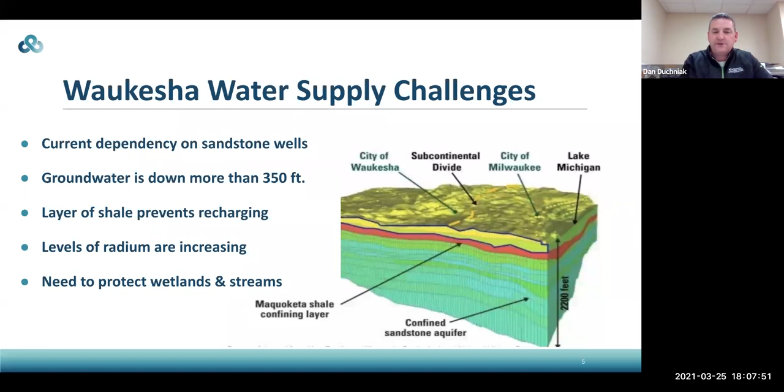So we went through a study. We looked over 20 years. We did a bunch of research and analysis, looked at more than 14 alternatives, studied 6 of them in depth, created an environmental impact statement with the help of the Department of Natural Resources, and came to the conclusion that Lake Michigan was the only reasonable water supply for the residents of the city of Waukesha.

It is not only the only reasonable, but it is sustainable for the long term because we're able to get into that recycle and reuse mode where we're able to pull water from the lake, utilize it in the city of Waukesha, treat it to a very high level, and then return it through the Root River to Lake Michigan, having that water be sustainable for the long term.

It is protective of the environment. We don't have a significant amount of impact to wetlands, rivers, and streams. And in fact, the Root River, the DNR has been looking for ways to get additional flow within the Root River for a number of years, since back in the 60s, where there was actually a plan to build a lake along Oakwood Road, pump water from Lake Michigan into the lake, and then return the water through the Root River.

So there's been a number of challenges with the Root River, and this is a way for us to gain additional flow during those low flow periods. And it is also the best solution for the ratepayers of the city of Waukesha.

So there was a number of phases that we went through. The first was working with the DNR to get approval for the Great Lakes alternative. As I said, we studied 6 alternatives in depth, and we created an environmental impact statement. That process took us over 5 years. A number of additional technical memoranda were created as part of that, and ultimately led the DNR to the conclusion that the only reasonable water supply for us was the Great Lakes alternative.

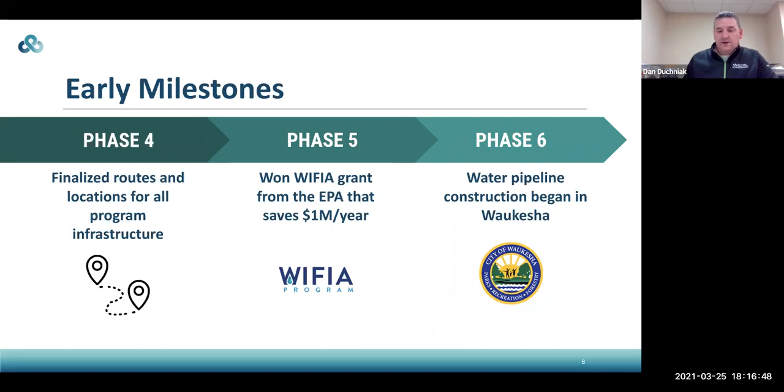That brings us to the next phase of the presentation, the route and communications. I'm going to turn it over to Katie Richardson, the program manager. She'll be taking us through this. Thank you, Dan. As Dan mentioned, I'm going to go through a little bit of the route at a high level and some of the different ways we'll be communicating with residents and others throughout the course of the program, and how you can reach out to us for more information.

So the return flow route starts in the city of Waukesha, goes from the clean water plant there through the city of New Berlin, Muskego, and then makes its way into the city of Franklin along Ryan Road, and then down south on 60th Street to the corner of Oakwood and 60th.

At the Oakwood site, there is a reaeration structure in a small building, about the size of a 2-story house, that will be operating very quietly. That's where we'll be adding oxygen back into the water before discharging it to the Root River. There's also some underground piping on that site. The Waukesha Water Utility owns about 75 acres in that area; there will be some homes across the street, but none right adjacent to it. It will be maintained to look much like it does now, except for this new additional building.

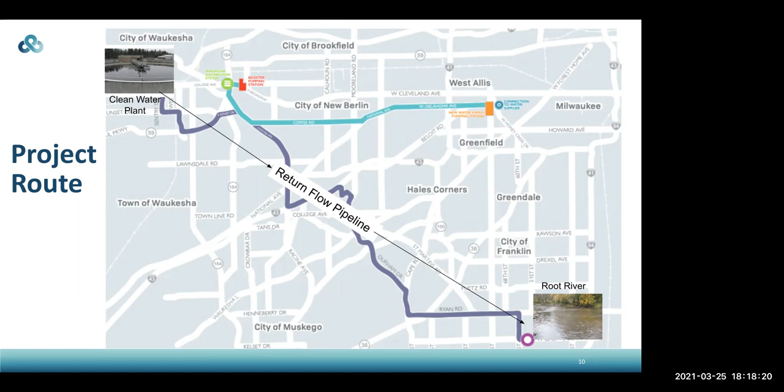The return flow pipeline might be a question that you may have. Why do we need to return this water? As Dan mentioned, as part of our approval with the Compact Council, we are required to take the same volume of water that is used in the city of Waukesha and return it back to the Lake Michigan watershed.

So there's a number of positive reasons to do this. One is that it will make sure there's a net zero impact on lake levels in the Lake Michigan watershed. It also increases the base flow of the Root River in low flow times, which is beneficial for the habitat and fisheries along the Root River east of the outfall site. At low flow scenarios, there's going to be an additional 6 inches of depth, beneficial for fish that need to spawn and come back into the river, giving them more water to work their way upstream.

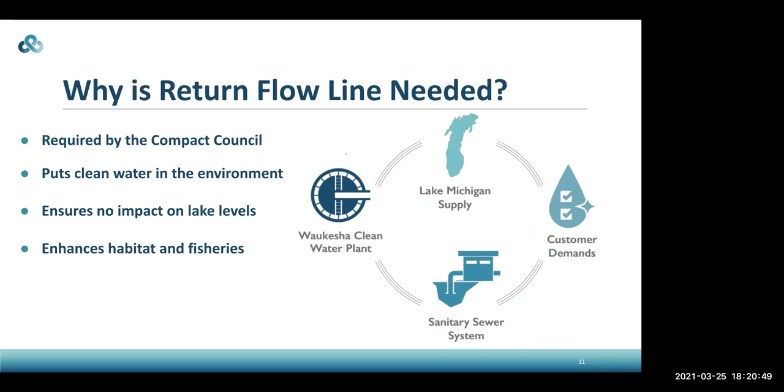I want to touch a little on the schedule. Construction of the return flow pipeline has begun in the city of Waukesha at the Waukesha Clean Water Plant, their wastewater treatment plant, and that work is moving through New Berlin and Muskego currently, on contract package 6 in New Berlin and Muskego. We're anticipating that this part of the return flow pipeline project will be completed in 2022.

So there'll be some work you're going to see in the near vicinity. That's why we wanted to have this open house, to explain what you'll be seeing in the near future here, as they continue with what's called open trench construction. Jeff will explain a little about the difference between open trench and trenchless construction.

Additionally, there's going to be some construction starting at the outfall site. As I mentioned, the outfall site will have pipe put in from the reaeration structure to the Root River, and there'll be an outfall structure built near the shore of the river. There's also going to be a small 2-story-ish home-sized building that will add oxygen back into the water before it discharges into the Root River. That construction will happen in the next 2 years as well.

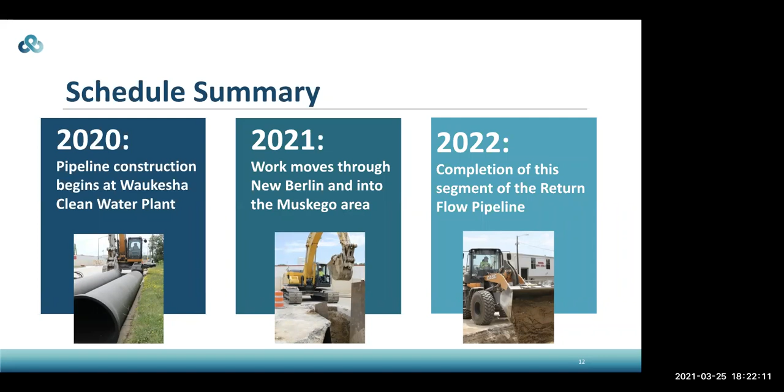If you have more questions for us, one of the most important things we want you to take away from this presentation is how to get more questions answered as they come up. The best source of information is the Great Water Alliance website, greatwateralliance.com, which has an interactive route map. This map has little markers showing where construction is happening, and at each marker there's pop-up information about that type of construction. For example, you can see Trenchless Technology, where we're constructing a little differently than open trench, or it'll tell you if it's open trench.

We're going to try and give you an approximate time frame in there. And if there's any traffic notes, if there's going to be a lane closure, a flagging operation, or a proposed detour, that information is going to be on that route as well. That'll be for all of the pipeline projects being put in for the Great Water Alliance. So if you travel from Franklin, or somewhere else in between Franklin and Waukesha, you can go to that map and look for where the construction is happening.

We also have, on the greatwateralliance.com website, an area set up just for the City of Franklin residents. You can sign up there for construction email updates. We send out email updates on the construction for the whole program approximately every two weeks. It will have information about some of the other areas, but that's going to have your most up-to-date schedule. It'll also be on the website, but if you want that information delivered to you, signing up for those construction emails is great.

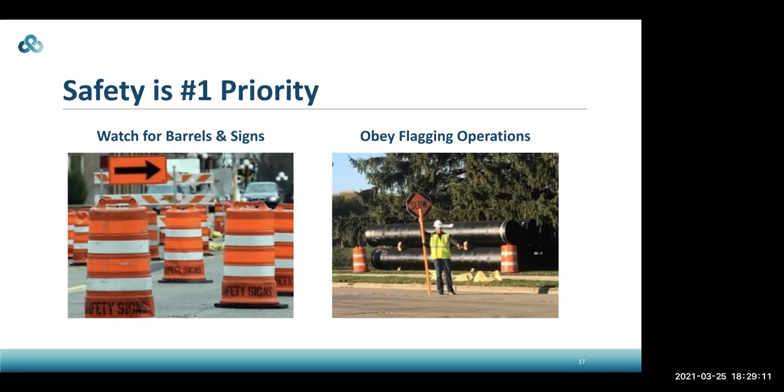And with that, I'm going to turn it over to our construction manager to give the construction overview.

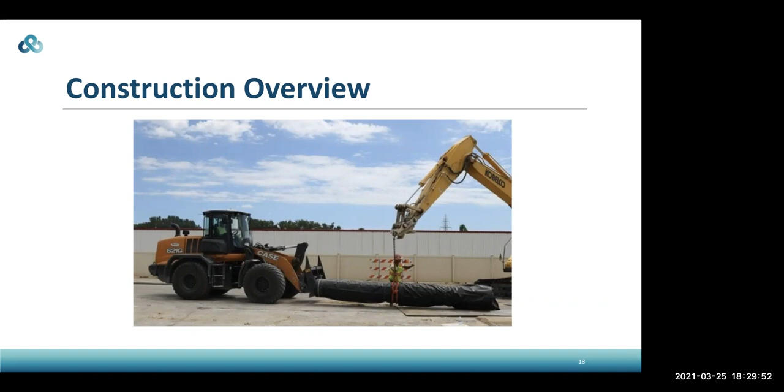Thank you, Katie and Dan. Like Dan said, I'm Jeff Champion, one of the construction managers that'll be working on the project. We're ultimately responsible for quality and control and working with the contractors to make sure we get this project completed as quickly and efficiently as possible, and to the best installation that we can. We'll be working with the local municipalities and with the residents to make sure everything works well, and we'll work with you as necessary.

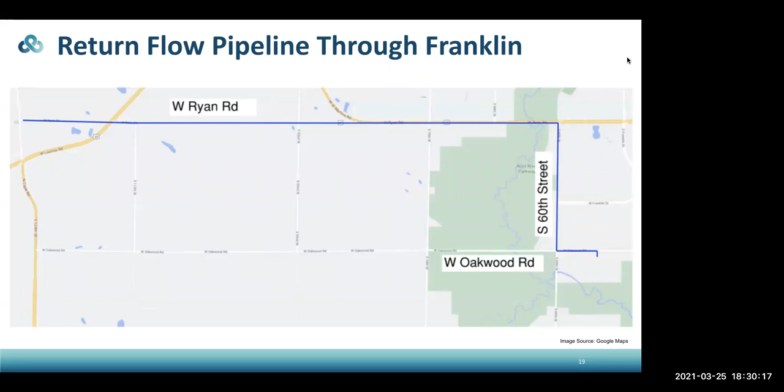Just a high-level view of the specifics of the return flow pipeline as it enters into Franklin. We enter from the west along West Ryan Road, travel east to 60th Street, then south on 60th to Oakwood, and then east for a little ways to the Outfall Facility.

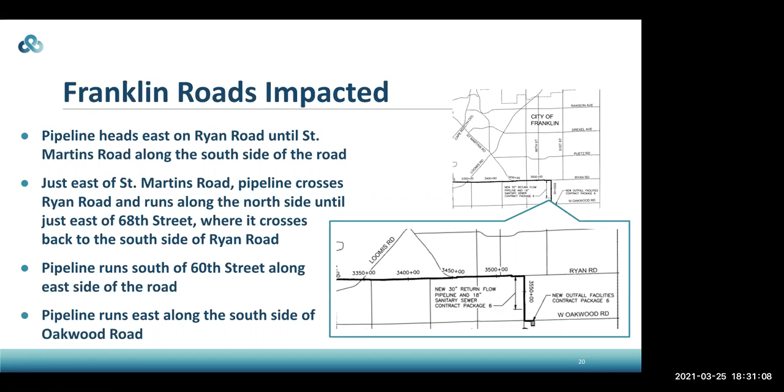As we enter from the west on Franklin, there will be some road impacts, but we try to stay out of the road as much as we possibly can just to maintain traffic and access. The pipeline heads east on Ryan Road until we get to St. Martins Road, and that is on the south side of the road. Just east of St. Martin's Road, the pipeline crosses Ryan Road and runs along the north side until we get to 68th Street, where we cross back again to the south side of Ryan Road. The pipeline then travels south along 60th, along the east side of the road, to Oakwood, where we travel on the south side of the road to the outfall structure.

Here we see a few locations along the route where we show some possible challenges or road crossings. Looking east on Ryan Road at Loomis Road, and then looking east on Ryan Road at the intersection of St. Martin - this is where one of our crossings would be. And then looking south on 60th at the intersection of Airways, where we are on the east side again.

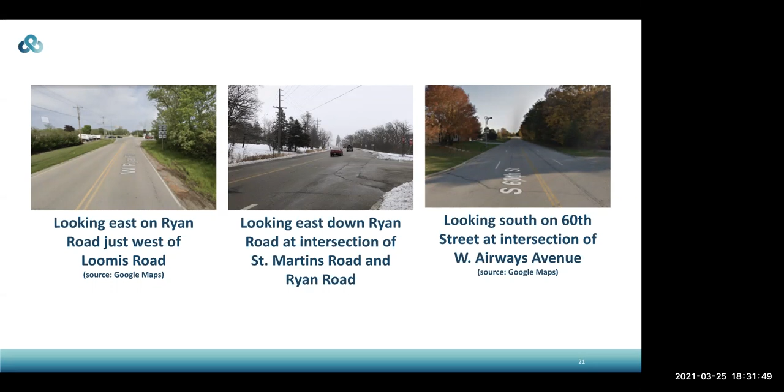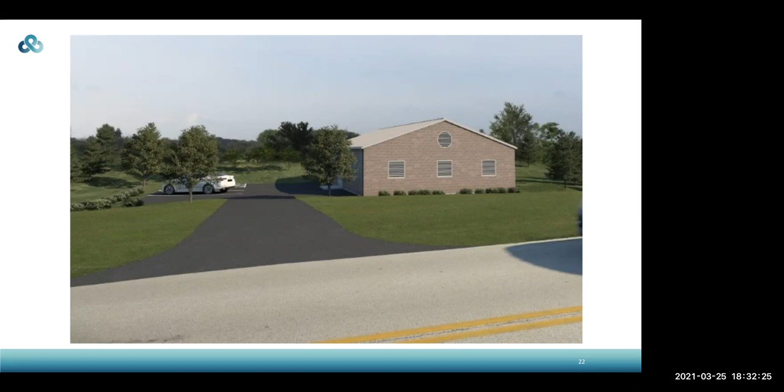Like Katie mentioned a number of times, the Outfall Facility is similar to a two-story residential house. This is just a rendering of what that facility is going to look like. As you can see with the car in the parking lot there, it really is not a very large facility. We try to keep it very inconspicuous in the neighborhood area, and it won't stand out very much at all.

In preparation for this project, Waukesha Water Utility and the City of Waukesha conducted an extensive pre-qualification process and set out competitive bidding. As a result, S.J. Louis was found to be the most responsive bidder and was awarded the contract to construct the return flow pipeline in this area.

S.J. Louis is a very capable contractor. Their work includes all storm sewers, sanitary sewers, water mains, and force mains. They do their own horizontal directional drilling and their own jack and boring, capable of jack and bores up to 144 inches in diameter. They also do their own dewatering, wells, sumps, and dewatering socks, as well as clearing and grubbing, soil erosion control, trucking, and traffic control.

Jeff, there was a question about whether you restore the grass and landscaping as well, and I think this would be a good time to answer that. We can answer that — the intent of the project, like Dan said earlier, with restoration of roads and such, is that we also restore the grass and landscaping to like-new condition, or like existing conditions, to the extent that we possibly can.

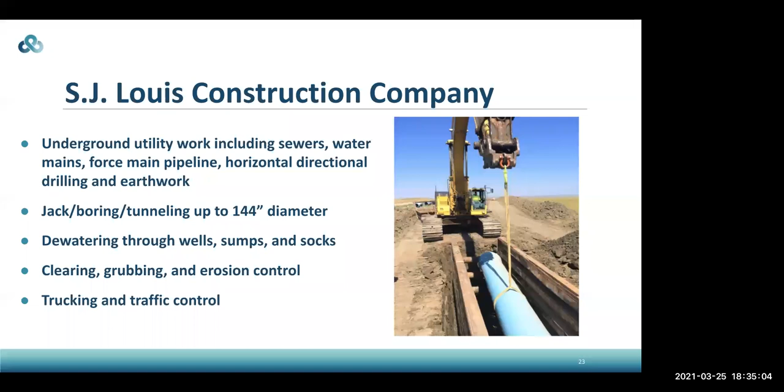As we talked about, there are a number of trenchless technologies that we're using, mainly to help minimize traffic impacts and avoid some conflicts like the plantings we just discussed.

The boring machines we'll be using will be installing 48-inch steel piping under intersections, roadways, and other obstacles. While you're in the area, use caution — it may look like there's no activity, but there's much going on underground. As you can see in the photos, a lot of the activities are happening in tunnel-type conditions where you won't see much work going on, but be reassured that work is progressing well, and we're trying to get through it as quickly as we possibly can.

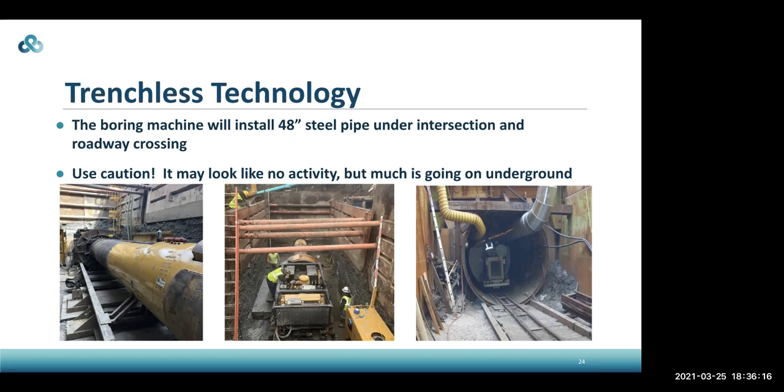Door hanger notifications — Katie touched on this briefly. Door hangers will be left in a legal and visible location on the property. Legal and visible means we will not use the mailbox, so you will not find these door hangers in mailboxes, nor hung on a fence. The most viable location is on a door, particularly the front or main door of the residence. We can go onto the property to place these door hangers.

So the front door may not be used very often, but during construction, if you pay attention to that front door, this is where you'll find these hangers. We've asked contractors to distribute hangers 14 days in advance of street closures or when work is close to the area, and also 3 days prior to any restrictions to property. For instance, if a contractor is going to cross your property and perhaps block or take out your driveway, that 3-day notice will give you advance notice and direction on what work's going to be done. One day prior, there will be a follow-up notice to make sure you're aware and that the contractor continues to be on schedule. Again, all those notices will be hung on an accessible, noticeable front door or the like.